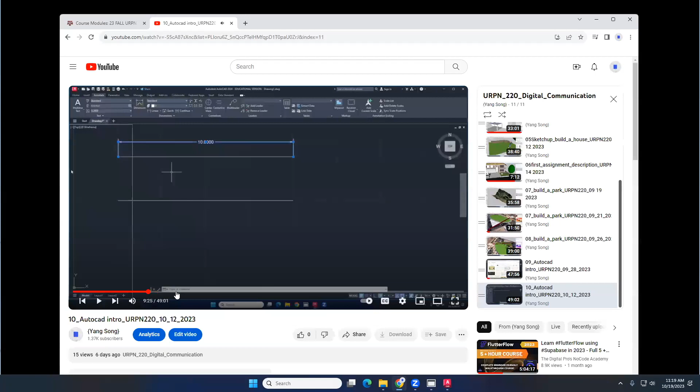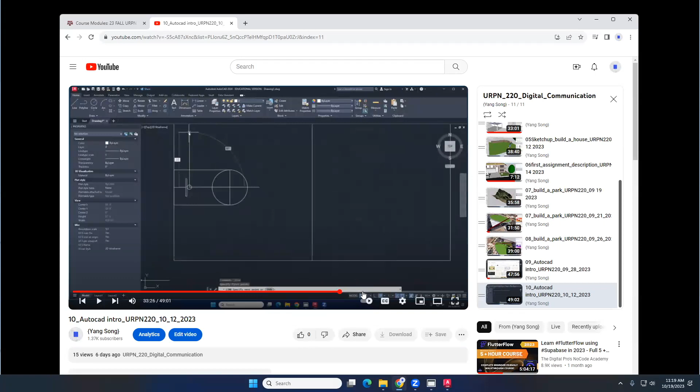So the AutoCAD - what are we doing on the other day? You can immediately tell from the screen. This day is about the basketball court - you can immediately know because you can see the screen, what is this, this is a basketball court. So you can remember how we did the basketball court. We also learned how to fix the dimensions, the label of dimensions in this video, how to change the size of the text, how to change the unit of the text, right?

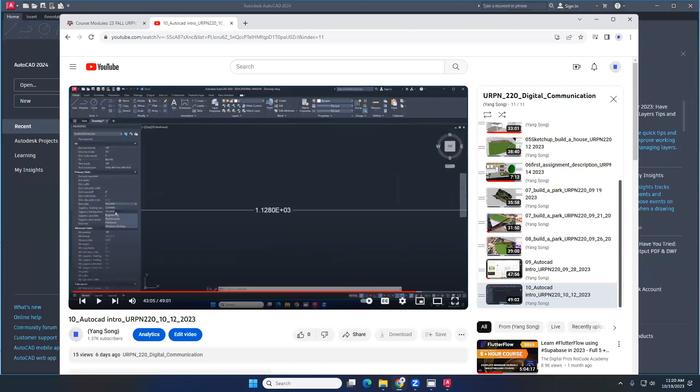These are all the things you got to do in your assignment. Let me pull up my assignment - make sure you go to your assignment. I have a zip file, and in this zip file you will have three files. You only need to open the one file with DWG. The DWG is the AutoCAD file, basically.

For example, it should be this file. So when you open it up, it should look like this. Okay, it should look like this. But there are a couple steps, okay?

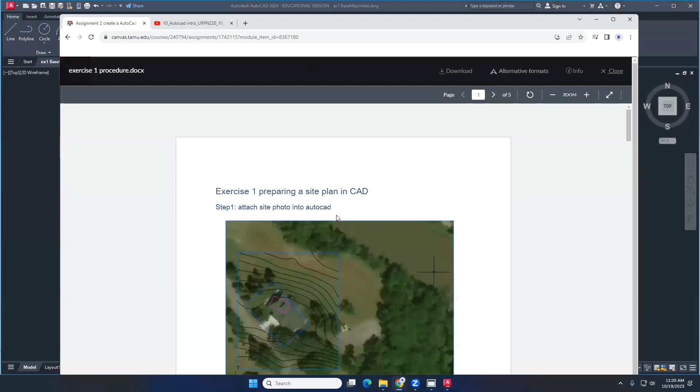So first step - I said attach a site photo on there, but in this case you can do that or not, this step I think is optional, okay. But then you want to create the layers, like this kind of layers. Right now we only have 3 layers on it - it's called concept, contours, and site border. So you need to create more layers on it. So the first step is how you create layers.

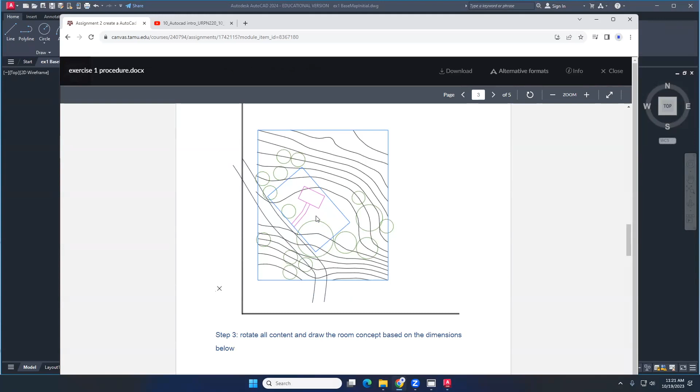And then once you create layers, you need to rotate them - that's key, what I mean by rotate. And also, what you'll find out is what I have right now, you see here - I don't have trees.

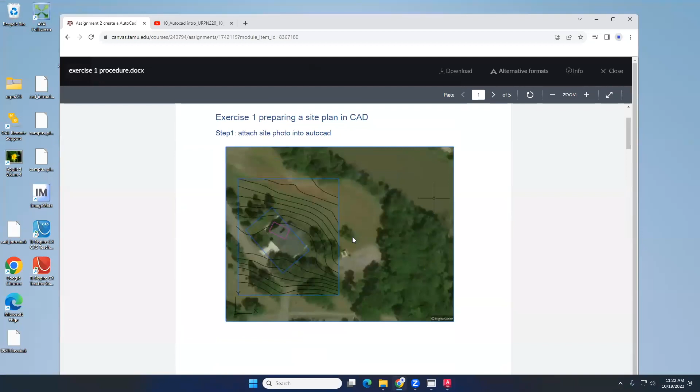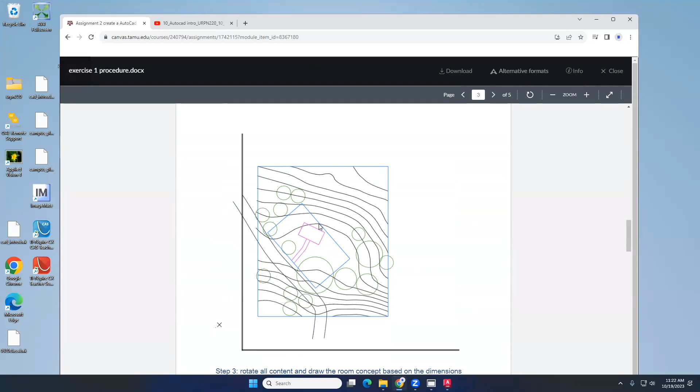What you need to do is kind of follow me in a way with the pictures on there, just kind of roughly draw the trees. That's like what I did - I roughly drew trees, it's not accurate, but I just drew the circles. That's pretty much what I did down there. And then I drew this plan. In the end, it should look like this - see, I rotated the view.

Okay, yeah, what's your question? I know you said it was optional - please send the image behind everything because I put the image in and now it's covering. Yes, because this case is tricky because...

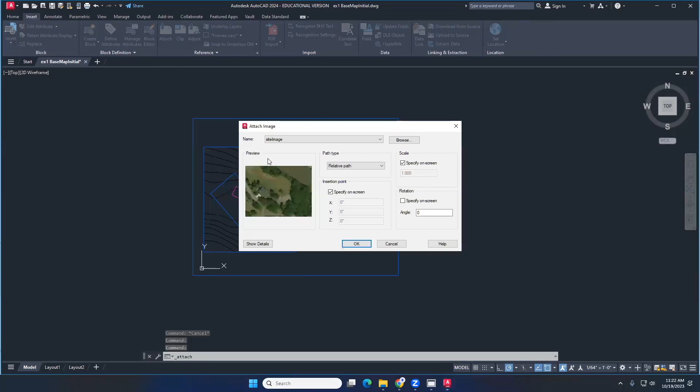See here, you can add the image, of course. You know, you can do this actually - kind of make sure it matches the border like this. You just select the image and right click, there's draw order, you send to back. See that?

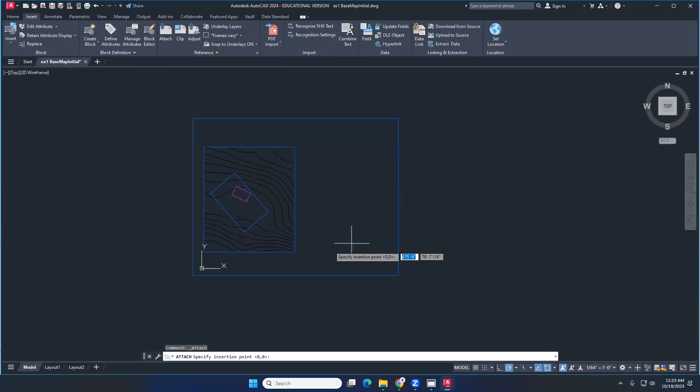Okay, so that's the first step. Yeah, you can go to it's like how we inserted before - attach, and then you choose the photo and click open and click OK, and you need to draw the beginning point, and it starts to follow through here. So it's perfectly matched. Then you can select the border of the image and right click, draw order, send to back, boom. That's how we do it there.

Okay, again it's optional, or you can just look at the image and roughly draw the trees over there.

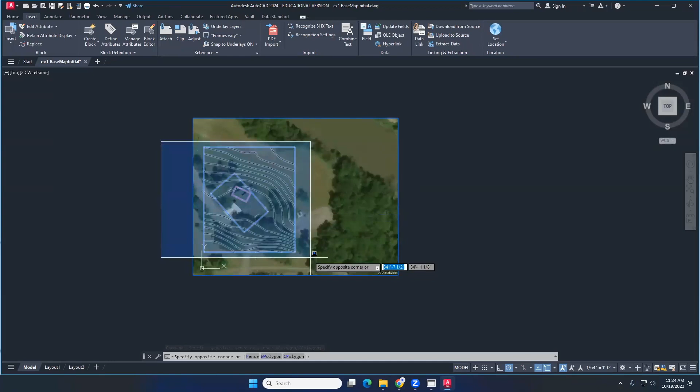Then what we do is rotate. Rotate is pretty simple actually. You just select everything and we have a rotate. Just make sure your house is kind of...

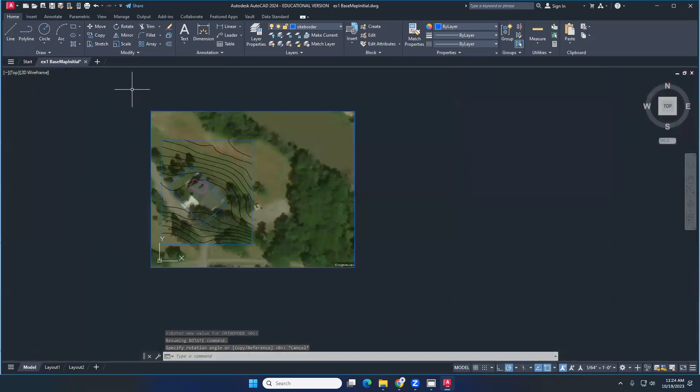Wait a minute, let me see. Go to rotate. You pick the base point. I guess the base point should be here. And just rotate them in general, it doesn't have to be perfect, okay. Just make sure they're kind of straight, then we're good.

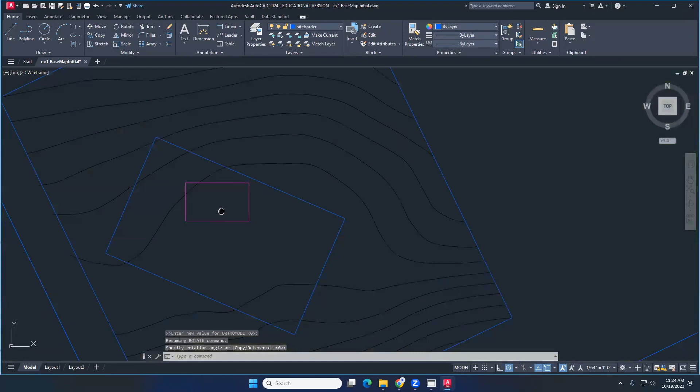You draw a line - what I actually do is I draw a straight line first. As long as they're close, okay, I cannot make sure it's perfect, but as long as it's close, I think it's okay.

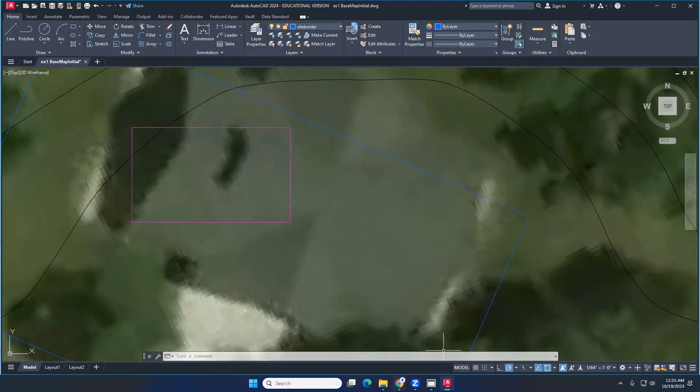Because this is more like a base map. So once you have a rectangle like this, what I will do is draw a rectangle again. So once I have this, this pink shape is just for reference. Basically what I do is draw this again.

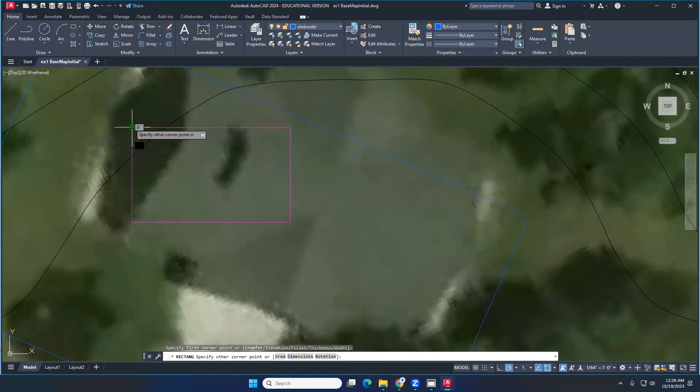So I know this is 15 plus 20 plus 15, so it's 50. And this is 22.6, 7.6, so this is 30. So it's 50 by 30. I just draw a box, 50 by 30 feet. Just draw it again, and I delete the previous one, so I can start with the new ones I drew. So it's perfect. Does that make sense?

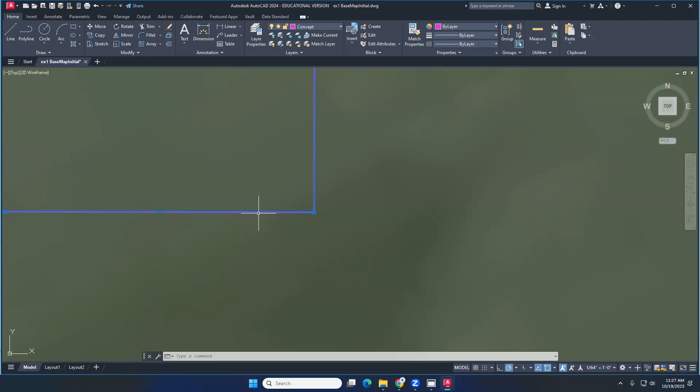Don't open the folder, open - see here, one click open. Don't click this, double click. Click this DWG file with that icon.

And you need, when you download your zip file, you need to right click and unzip it, turn them into a folder, okay? That's very important, that's the first step. You need to make sure you can open the file so you can work on it.

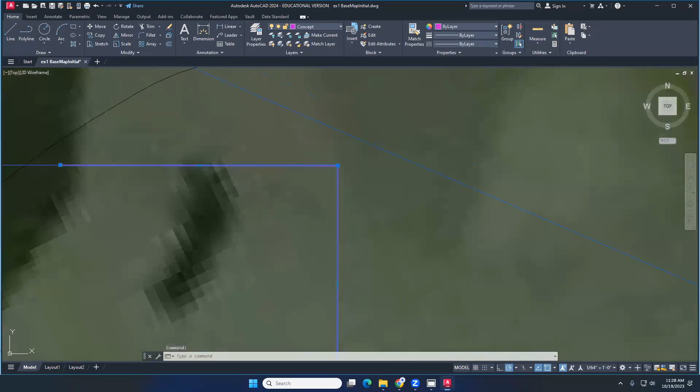It saves you a lot of work because the unit is already set, everything's already set with this assignment, so you don't have to worry about the units - I already have units set. The only thing is you need to rotate it and delete this pink line and draw your own. See, I delete this pink line.

Did you unzip the file? So unzip the file, and then you should find this DWG file.

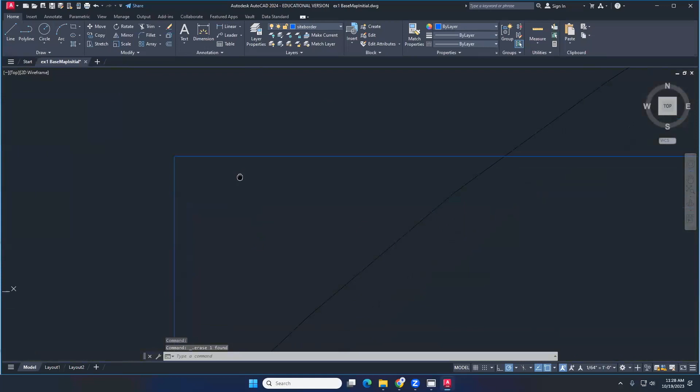Can you do it? Oh sorry, I forgot to turn this on. So okay, see, I download the folder. See, I click the folder, I download it.

So that's kind of about Windows, it's not really about AutoCAD. See, this is zip - when it's zip, it means it's a compressed folder. You cannot open it, you cannot use the file inside of it. It's just for people to easily transfer them, so it's one file, not like 3 files.

What you need to do is right click, extract all. You need to extract them out. So: zip file, right click, extract all. Once you click extract all, you can just use basically all default options, just extract.

And then you should see exact same thing I see. You should see that DWG file and all the files that are separate.

So find the zip file, right click, extract all. Zip file, extract all. Okay, and then you open AutoCAD and you can open our DWG file.

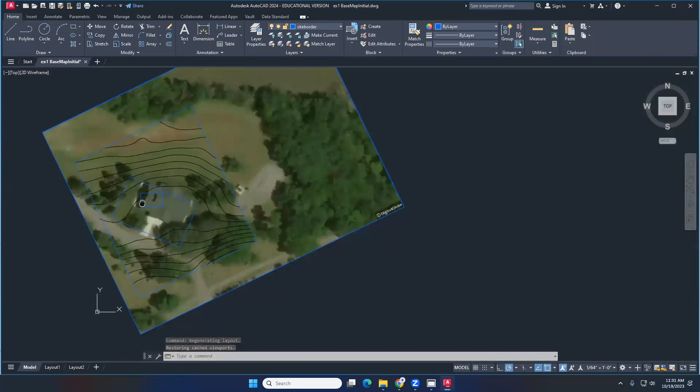Yeah, thanks for letting me know that. Zip file is something you will see a lot, so just make sure you have 2 kinds of files in Windows: folder and zip file.

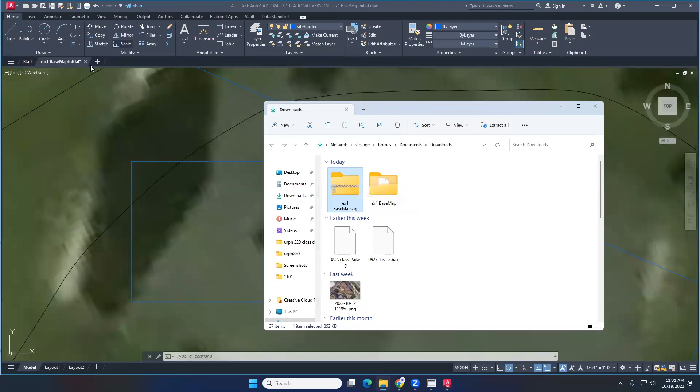You're not doing it - you import the DWG file, yeah. Click open, find this DWG file. Okay, so we're good.

No, you're good, you're good. So here's the thing: you don't have to do this. I know you guys want to save time, but I think it's more important to know the flow, so you know what's going on here, because you cannot finish this right away.

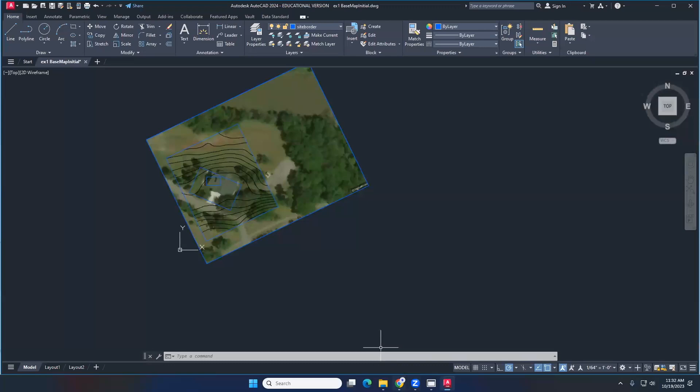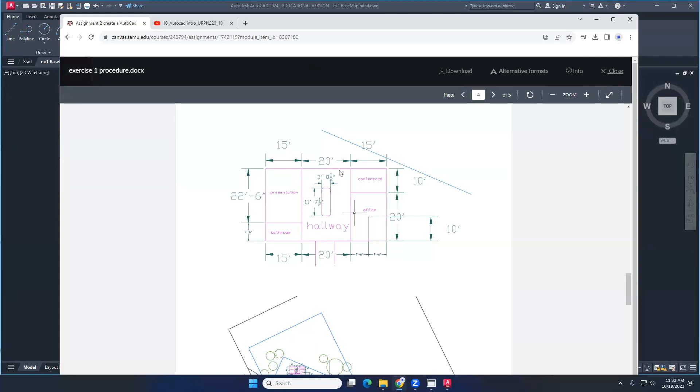Okay, but there are caveats. You don't want to copy someone else's work. You want to make sure you do it on your own, because I can really tell whether or not it's copied from somebody else. The way you rotate is different - everybody's different. Okay, that's how you grow up.

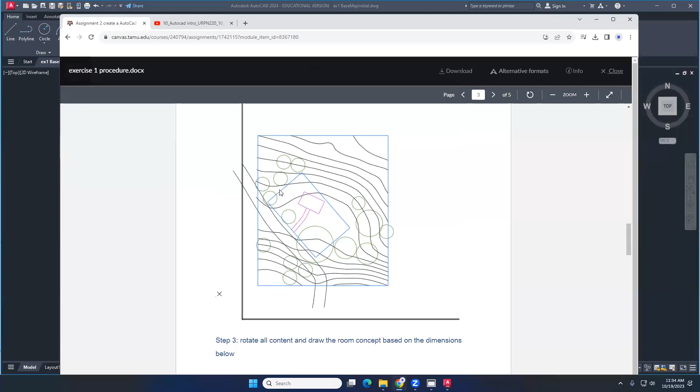We just don't put it against... that pink square is no, don't worry about it. The picture is for the trees. We'll delete the house and build a new one. It doesn't matter about the photo, it's just for the trees - we're learning the skills.

Well, in the AutoCAD file, it's not rotated. I rotated it right now. Here. I mean, yeah, I will do it. Yeah, good questions, those are all good questions. Let me see, let me...

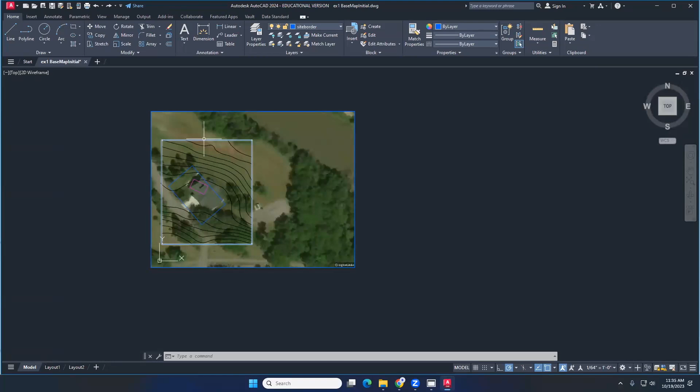Because when you first started, this is how it looks. How do you draw the plan on there? It's impossible - how do you draw this in this view? Because you need to draw straight lines, all the lines. How do you make sure I draw lines parallel with this line? It's impossible. That's why you need to rotate everything, to make sure they're straight.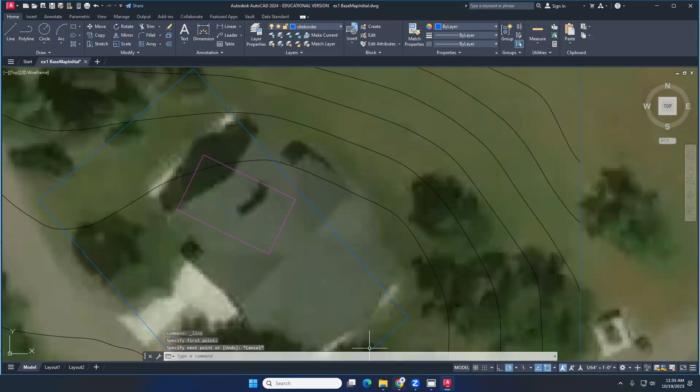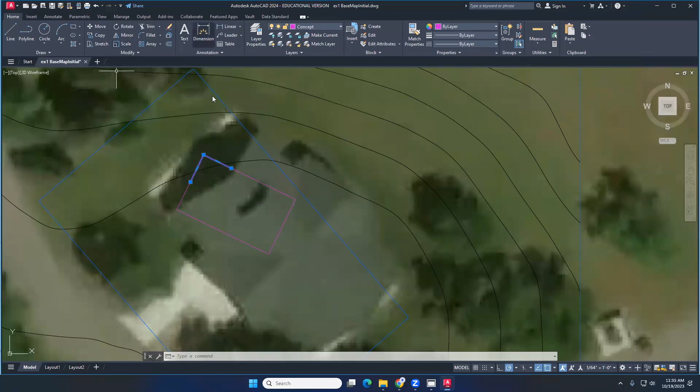So you can draw this and make sure they're the right thing, right? And also, when you rotate, after you generally rotate them, you don't want to use this pink box too - this pink box is actually wrong. The pink box is just for you to generally know whether or not you rotated it in the right direction. Then you need to delete the pink box and redraw a house in a general location. So you don't have to be exact location, okay? Actually, I envision everybody is in a little bit different location. So, anyway, that's why we do it.

You have a question? Oh yeah, you just select the photo and right click. There's draw order, send to back. So the draw order is kind of, you put some on the top, some on the back. Yes, good question.

Well, the pink box needs to be generally straight. This line is not straight, right? So you need to rotate them, make them straight. That makes sense?

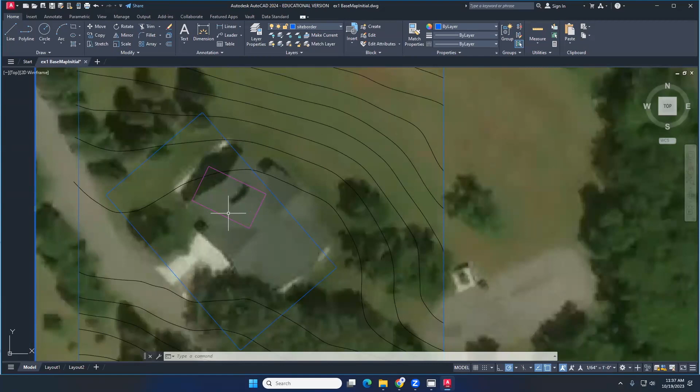Let me show you right now. See what I'm doing. Just look at the screen, okay? Please look at the screen. See here - rotation is the first step. Actually, it's super important, okay? Because without good rotation, there's no way you can do other things well, right? I click rotate.

I rotate this box. Right now it's generally straight, right? Is that straight? Okay, I click. That's it. And I delete this - after this is done, I just deleted the pink box now. The mission of this pink box is done. I just delete it, and then I start to redraw the house generally in this area.

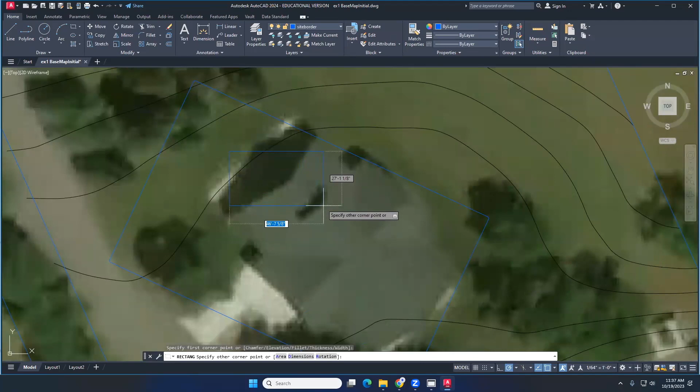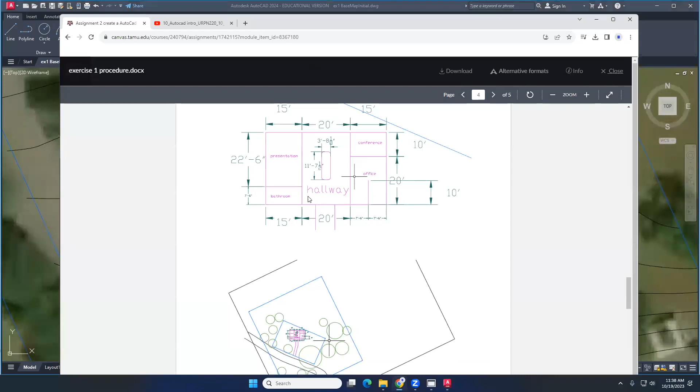Make sense? Perfect, yes. And then please ask me, just ask, okay, if you have any confusions, because you need to do this on your own later on. So once you start to draw, you just go ahead and start to draw the plan, okay? Just start to draw the plan. So in the end, it kind of looks like this, okay?

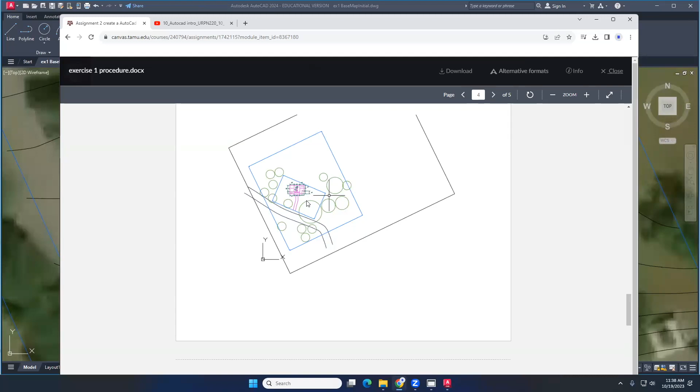See, I also draw the driveway - there's a driveway, you can draw your driveway out. Okay, you can draw whatever driveway. So make sure you also have a driveway, okay? So it looks similar to this, okay?

Then the most difficult step is this one - print. This is the most difficult step, okay? Let's envision we already drew the house, right? Like say we already drew the house, we drew some plans in there, see like...

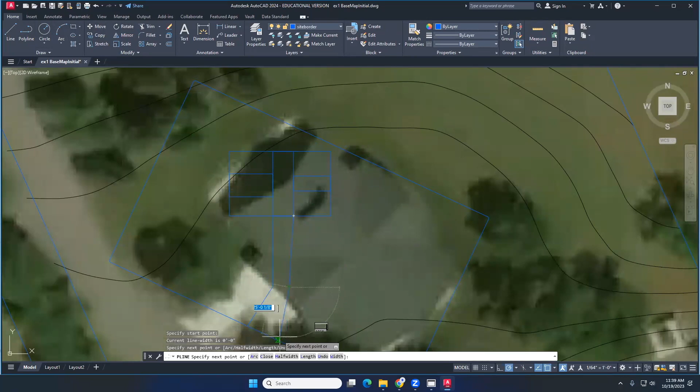You draw - just envisioning this is the plan I already have. Okay, and draw the driveway, so I draw the driveway, draw another. Okay, so just envisioning this is what I draw, right? And it needs to be in different layers, okay? Don't forget, it should be in different layers.

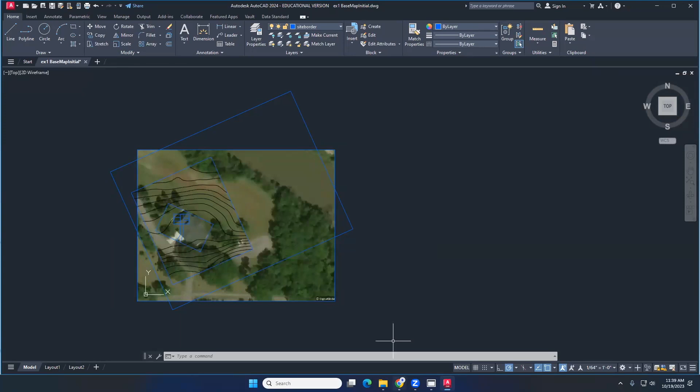And then we're not done yet, because this is not the submission, okay? You're not submitting - this is just part of it, right? The last step is the layout. So you go to layout, because this last page says print the result by designing a layout that's below. So this is the layout, okay, it's a layout view. That's why, like you said, the white is white, right?

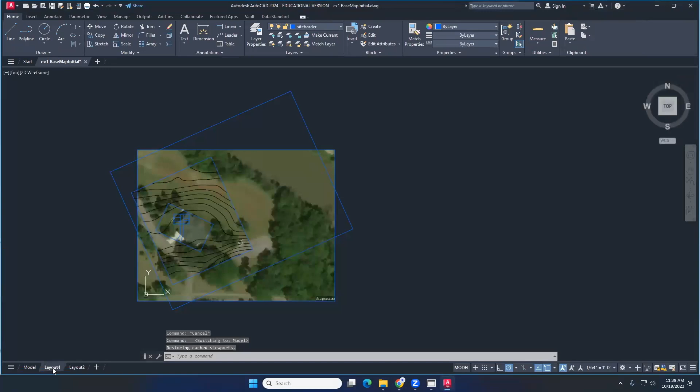The white is a layout - it's like your paper, okay? And this is model, this is layout, right? So what do you do after you're on layout? This is kind of new, okay? You go to layout, see there's a layout. Actually, that's something you can practice right now - you can go to layout. You go to layout, click layout, click layout. So in the bottom, there's a model, there's a layout 1, layout 2. Just click layout - this is model, this is layout.

Press escape, go back to the selection mode. Layout 1, model, layout, model, layout.

Oh yeah, you good? Yeah, no, we're good. And then how you create a two map.

Our goal is we need to create two maps, and the two maps are in two different scales. Like this is city, this is your house, right? This is a big scale, small scale. How we do that is this scale is 128 by 1, this is 8 by 1.

Okay, the first step, if you look at this, it says print 11 by 17. 11 by 17. I remember the number 11 by 17. So you need to make sure your layout is 11 by 17.

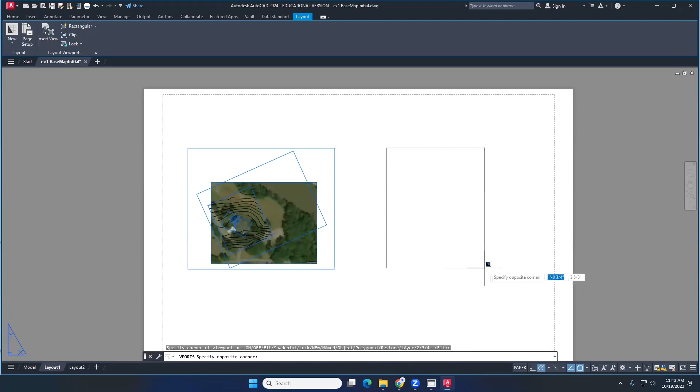So this layout view is one view of our model space. And I can draw another box, doesn't have to be the same. Once there, we're good.

So that's how we have both, that's how we have two of them. But we're not done yet, because they should be in different sizes.

How we do that? The first one, you click the edge of it. Once you click the edge, you see here, there's all kind of options. There's one, see this, 128 and 1. See, it's the exact same as what we show here.

So I just change them there, so it looks like this. It's exact same, it automatically makes the scale for you, so this is accurate.

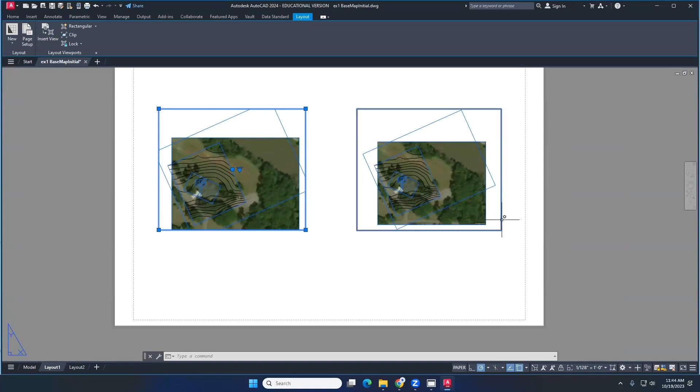And for this one, it's not 1 by 128, it should be 1 by 8. So you go there, find 1 by 8. Oh, there's one here, exact same thing. You click, boom. See, they become bigger.

But the issue is it's not showing my building. So what I do is click here. Look at here, this is key, okay?

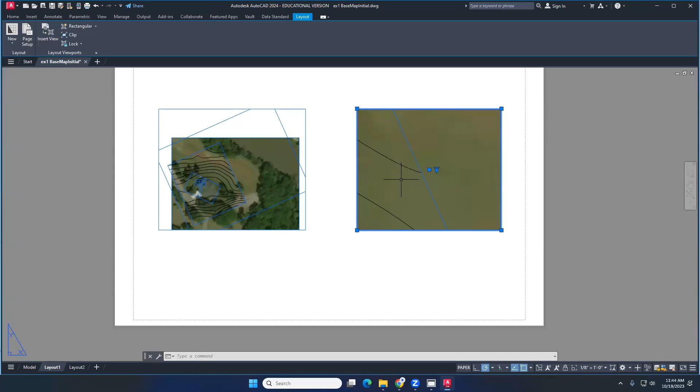You know how to change scale, you simply select it and change it. But sometimes the scale is right, but it didn't show the things you want to show. What you do is you double click in, and use the middle button, and you can start to drag, to move.

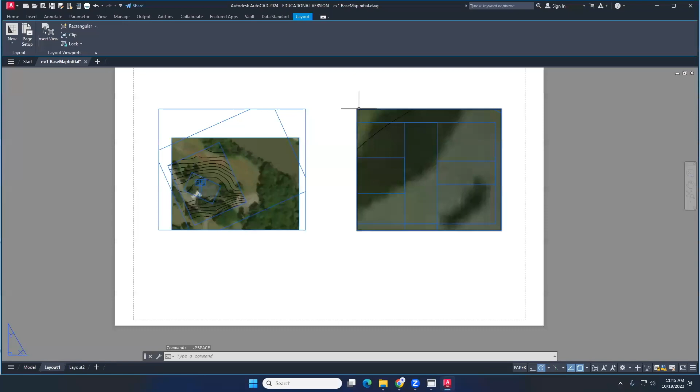And then you can find your house here, see that? You can find your house here, and you double click somewhere else. In this case, our window is a little bit smaller, I just make them bigger. So this is the exact same house, so one is an overview, the other is like a zoomed-in version.

Good, perfect, nice. So after this is done, you just draw some text. Text is super easy, you can type things in, whatever it is. You should type the same thing.

Okay, wait a minute, still too small or something. Why is that? Let me see. How do you type in? Let me see, type some in, close editor, it's not showing anything.

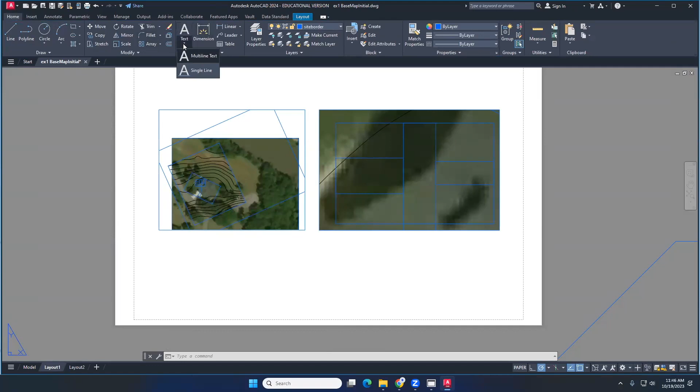What's the best way to do this? Let me see. Single line text. Oh you okay? So yeah, I guess mine is, oh I gotcha, so yeah you got it.

So texts always have like a scale issue, so you always have to kind of adjust. It's either too small or too big, depending on how you do it. You go to property and you change them out, that's basically what we do.

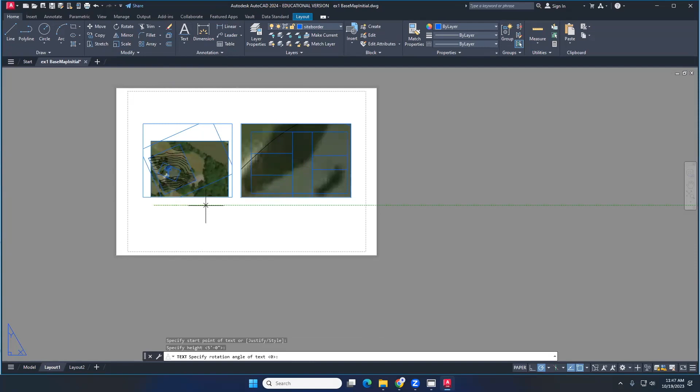Single line text, you can play with it, click it. Yes, you're right, it's big, it's super big. So yeah, my text is like this.

So I click it, right click, go to properties and change them smaller, make them smaller. So right now it's 4 inches, I make them like 0.2 inches. So it's right, yeah, it's about 0.2 inches. So you have text, so in the end, just add text.

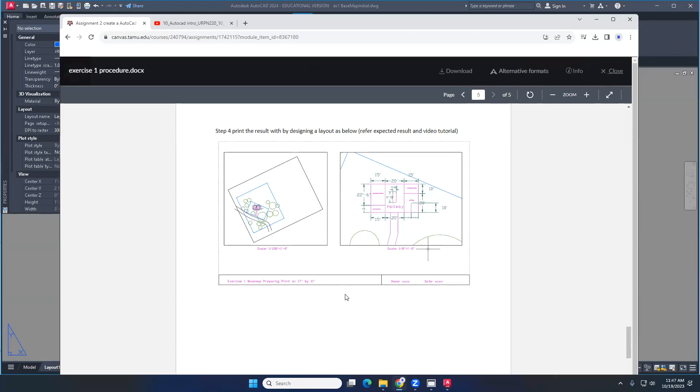Good, perfect, right? Once you know the general process, then I will go out here and help you. Make sure that you hit ESC to kind of get out of your current tool.

Okay. Okay, I guess that's it.